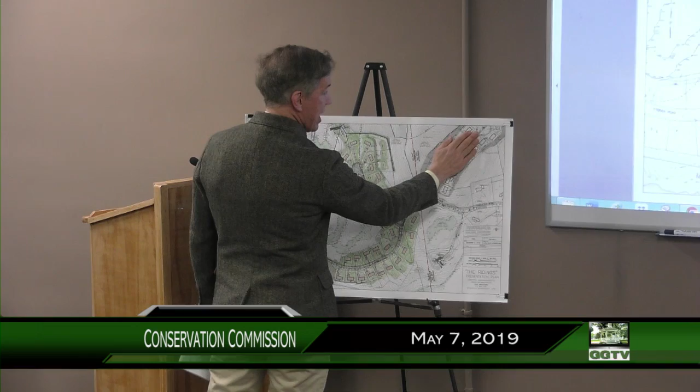And the phasing that we're proposing is that the first phase of construction is the main road, Stinson Road, and Harvest Way is this connection. The second phase is the two cul-de-sacs. That is because, again, of the material balance required; in order to have more than a 500-foot dead end, you have to connect all the way through. And to make this necessary fill in here, you have to take this cut from here. So the first phase of construction is the main road and the connection to Harvest Way. The second phase would be the two cul-de-sacs in Grafton.

I guess I'll leave it at that. I'm sure there's other things that will come up as questions or that I'm forgetting in the moment, but I'll try and answer your questions.

Sure, so from a standpoint of low-impact design, what are you proposing? Say you have really good soils. What are all the different things that you're doing to have a more natural-based system? Well, we're doing infiltration as much as possible. We are concentrating by having the open space subdivision, we're having smaller lots. We're talking stormwater. Are you doing roof infiltration? Yes, to the extent possible, and I don't have the number of lots. If you look on the plans, you'll see, for instance, on lot number 22 here, you have it in the backyard, 23 in the backyard, 4, 5, 6, 7.

Basically, because this is a till material with a relatively high, typically like a 36-inch, depth to seasonal high groundwater, we're infiltrating roof runoff on all the lots where there is fill. But on a lot like number 17 here, where it is cut, we didn't think it was really practical to propose roof infiltration. So we don't have dry wells proposed on the cut lots on the uphill side of the road, but we do on all the downhill side lots, and on the lots that have fill on the downhill side of the main road. We also have a couple of these lots as well. We did propose it on all the lots where we believe it was feasible.

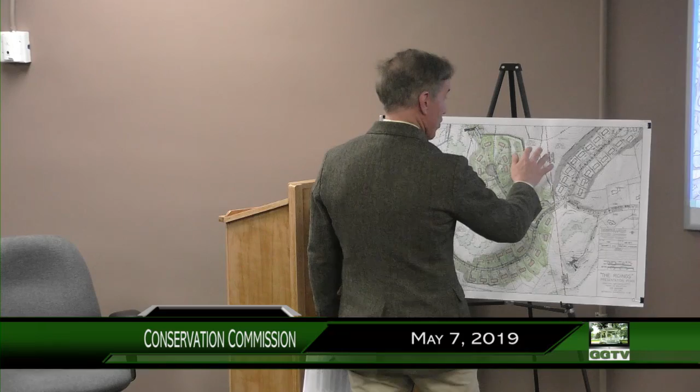But yeah, if you go further up the hill, somewhere here you hit the 70, 80, 90, 600, you're in the 600s at the peak of the hill. And you said where's the runoff from the Westboro side? Where's that going? Sure. It's a couple different ways. Much of it actually goes to the wetland that's over here, on the, I guess you say north or east side of Harvest Way.

That flows through a culvert, you see a bit of a green edging here. This is wetland. The flow from that culvert goes through a wetland here, and there's two culverts under the Mass Pike, two similarly sized granite culverts. One is just to the Grafton side of this town line, probably about here, and the other one is over here. So most of the Westboro site goes to that wetland, through the culvert, through the wetland, and then down to the big culvert into the Mass Pike.

Again, it's kind of an oval-shaped peak to it and contours. Much of it actually is coming into the Grafton side, and is going to go through this open space. So I'm glad you raised it. You notice on the back of these lots, numbers 18 through 21, you see a dark line here. This is hatching, indicating a very wide swale that's proposed.

We were debating to try and pick this up with a series of drop-inlet catch basins, but we just made it a very large and wide swale to protect the backyards of these lots and direct the runoff coming down the hill to that detention basin. And then in terms of moving of the earth from the Westboro side down to that southern portion there, is that going on both sides of the road? Yes. Okay.

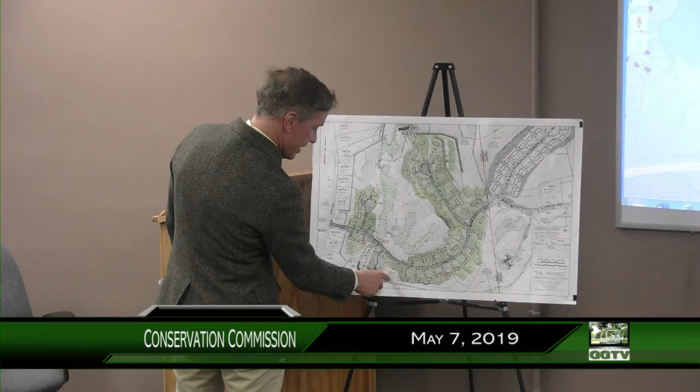So I don't think it's actually gonna be a significant change from right now, because this area right now does have some, you could draw up a little sort of long pie-shaped contributing area to what gets here. But again, most of the hill flows into this wetland and then down. This is just, again, sort of narrow swaths of the hill that are getting to this area, to that wetland in particular. Still going to be a bit of a gully, though.

I'm assuming the Mass Pike at that portion is going to be elevated higher, so in between the two. It is. Yes. So okay. And then in terms of the Grafton water, you said they get good water pressure there. Is there a pumping station going in to get the water up the hill?

No, actually, and I'll get the numbers wrong, but on both sides, to our very pleasant surprise, one of them was like 100 PSI, the other was 90 PSI. I forget which one was which. They were both very strong, such that even if you take that and look at the highest house, you should have more than adequate pressure, even with the drop for the distance and the drop for the friction.

Okay. And then which side is going to be used as the construction entrance? I don't know that I could say that either side is gonna be exclusively the construction entrance. I'm not familiar with the Westboro side, but just knowing the Grafton side, Adams Road is obviously not a large road. I can tell you this is easier to drive in. I'm just talking in terms of the heavy equipment coming in, and Adams Road, the town's going to end up having to replace that again.

This is easier to drive in, and I know that the discussion with the folks in Westboro was just that they didn't want a trucking route, material leaving here, and they were relieved to find that you're essentially taking material from here to there. But I don't think it has been planned necessarily as either side being an exclusive route. I think it would depend upon where a vehicle is coming from.

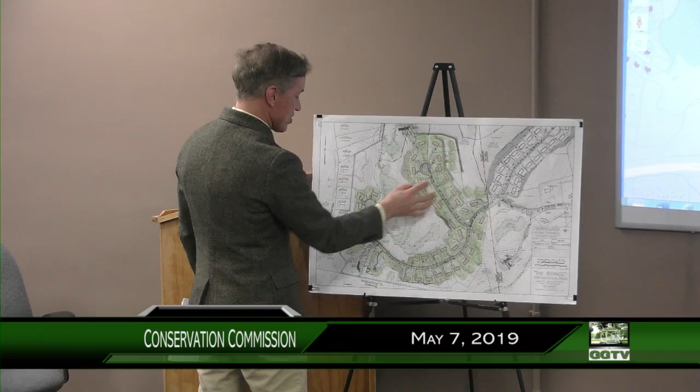Then one other question. In terms of the housing, only because I haven't seen that yet, what type of housing is going in? Obviously single-family homes, town water? Single-family homes. Yep, and the Westboro side has sewer. The lots on the Grafton side are actually a little bigger because one of the odd things about the Westboro equivalent of the open space bylaw is that it restricts you, you can't have a lot more than 15,000 square feet.

And that's how they achieve getting a certain amount of open space. Whereas the Grafton bylaw, which I think is better, says you're gonna give us at least 40% of your land. Actually, we would be giving 62%, but you're gonna give us at least 40% of your land, and then it has sort of restrictions within that of what your average lot size must be, et cetera. And the average lot size is, I think it was just over 20,000 square feet. So the lots are actually gonna be larger in Grafton than in Westboro.

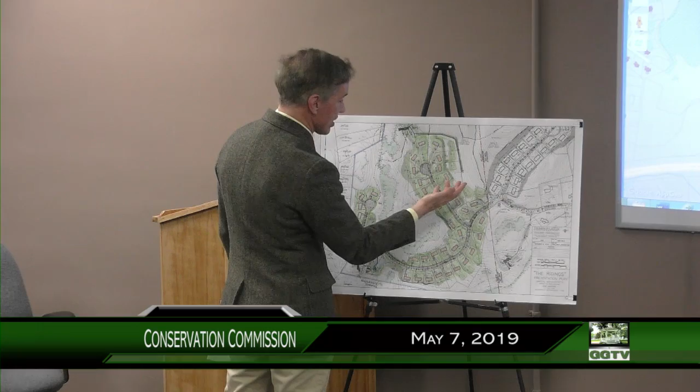We're showing the same size house, which again is just a stand-in as a theoretical reasonable one of 70 by 36 on all these lots, both in Westboro and in Grafton. So what's your typical square foot for the house? Oops, I had it before. Roughly, 2,520 square foot footprint. And there was a point of discussion too in the Westboro side.

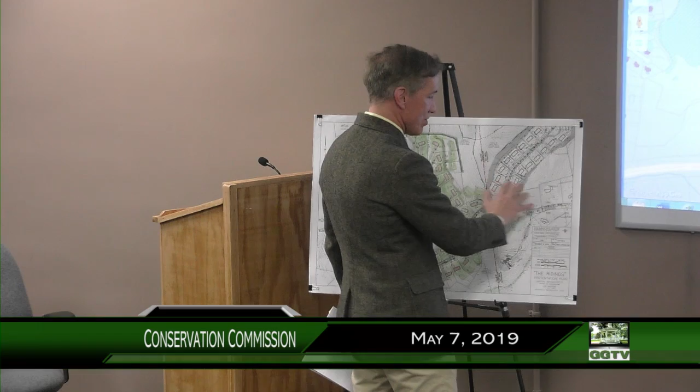There was some discussion worrying that these houses would not be up to par with these, and we're actually able to show, because we had done the as-built of the foundation of some of these houses, that that's almost exactly the same size houses as some of the people who said they were worried that these houses would not be up to snuff with theirs. So I can say it'll at least be a comparable home. Anything else, Scott? Nope.

So, a couple of things. You don't have a separate erosion control plan in here. No, we have it on the grading plan. For me, it's all the things that aren't shown on here. That question is your slope stabilization. I think on one of them it shows an entrance and so forth, but there's not a lot of detail. All you have is perimeter fencing and a couple of random areas of settling basins. So a little bit more detail on what's going on with erosion control, details and things like that. You've got large cuts here.

This is a cut or a fill. Let's see here. That's a cut. The bigger are the fills on the Grafton side. Yeah. Well, this one's a big cut, it's a 24, 30-foot cut, and I know you have 2-foot contours, so it's hard for me to tell. I guess 2 to 1, 3 to 1? We have some of both. Okay, so what are you doing for slope stabilization? Well, in the details, we do show that slopes steeper than 3 to 1 would be either riprap or an erosion control blanket, actually overshooting it for a 2 to 1 slope, rated for use on a 1 to 1.

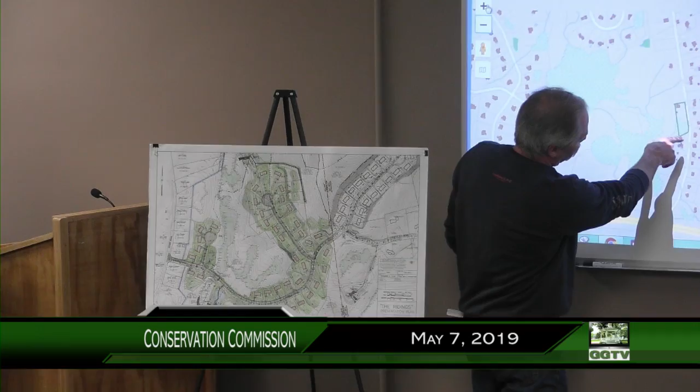So this wetlands here is all part of the property that we have. There's actually a stream that runs down here and comes onto Adams Road. That's 106, that's the O'Connor's house. And some of it runs into the catch basin. The 6 catch basins through here dump onto our wetlands. Gotcha. So anything that runs down the hill into the catch basins ends up in our wetlands. Then there's a stream that runs between 100 and 98, and it actually floods 98 Adams Road's basement.

They have a sump pump that runs almost constantly. That pumps into that stream bed, and that runs under the road and into our wetlands. And then there's another one between 98 and 96 that comes down off this hill. So when they start working up here and building up here, my concern is the runoff from the roofs, the roads, the driveways, the sidewalks.

Now there's not ground up there to absorb it, it's all gonna be faster moving with less absorption, and it's gonna run down these stream beds and end up in our wetlands. Our wetlands now have gone almost up to our shed. Our side yard, where our shed is over here, we used to be able to walk on it in May or June. We can't walk on it. Last year, we couldn't even go over there and mow because it was so wet, you would leave a footprint, and it's even worse now.

So this winter, the frost heaves actually moved our shed 6 or 8 inches up into the air because the water table is so high back there. It's been a wet season, and we didn't have a lot of snow, but we had a lot of precipitation. So our concern is less area for absorption and more speed to the water with the roofs and the sidewalks. And we wanna make sure that there's some way to make sure that they're gonna prevent any excessive water coming down the natural flow that's already there, which is gonna flood us even more.

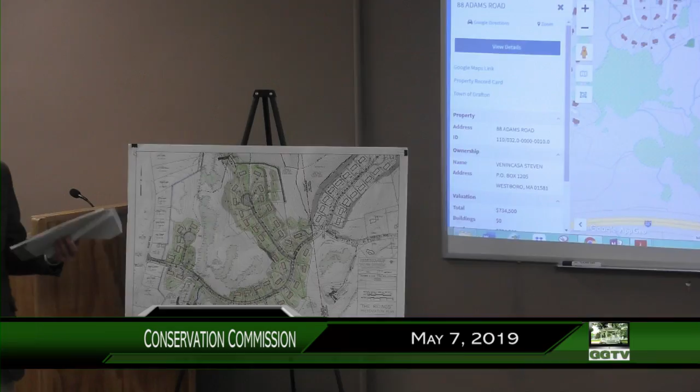You also are showing that the open space is going to be turned over to Sudbury Valley Trustees. Correct. Do you have an agreement in place on doing that, or is it just a? There's not a formalized agreement, but Steve Sloan of Sudbury Valley Trustees was attending all of the planning board meetings. Okay. And it's not just a speculative thing on the part of the applicant. He's had a lot of discussions with them, and they indicated their interest in taking ownership of this parcel.

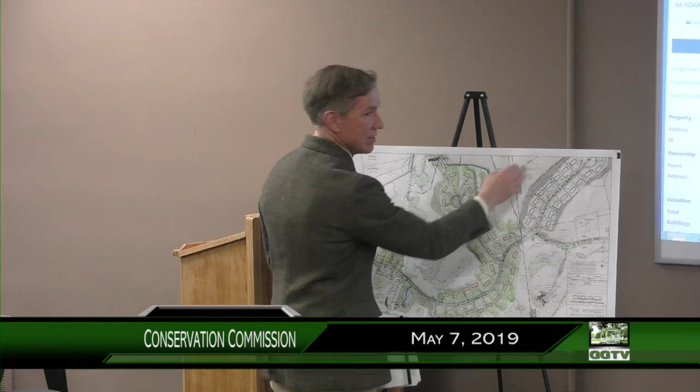In fact, they also had discussions with the adjacent open space parcel on the Westboro side, and I think the way it has been left at this point is the town of Westboro Conservation Commission wants to keep official ownership of it, but they're actually gonna have Sudbury Valley Trustees, in effect, maintain it, if you will. So they'll do a conservation restriction, and then Sudbury Valley Trustees will be the holder of the conservation restriction. So that's the way that works.

We're fine if, as obviously the planning board, you have to go through this and designate who's gonna have the open space, and Sudbury Valley Trustees is fine by me. I just wanted to make sure that we understand what's happening with the open space, and that open space cannot be developed in the future. We understand. So, having said that, hopefully everyone got a little bit smarter about this particular project.

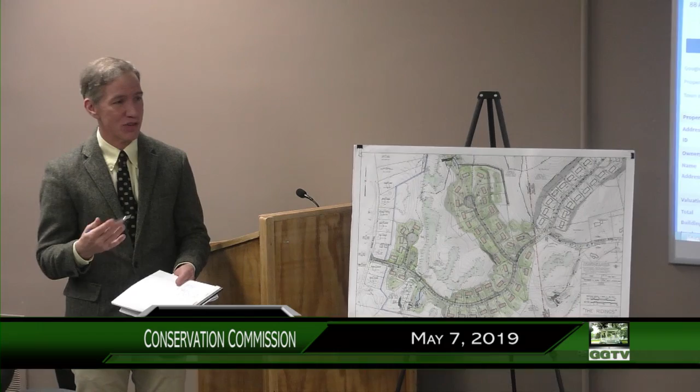Again, we're basically gonna ask the applicant now if he wants to continue this. Since you don't have a DEP number, you have no choice. We can't close a hearing without a DEP number. Having no choice, Madam Chair, I would request that we please have it continue. And if you want to get picky, some people will not open a hearing if you don't have it, but that's okay. So when would you like to continue it to? What are the options, 2 weeks out or a meeting in June? I'm not sure 2 weeks out is the right choice, given the interaction we still have to do with the planning board and the peer reviewers.

Maybe we should request June 4th? June 18th. We're not doing June 4th, summer schedule. Okay, I guess I would request a continuance to your June 18th meeting. Okay. I'll make a motion then. Yep, go ahead. I'll make a motion that we continue the hearing for the Ridings subdivision until June 18th. Do I have a second? I second it. All those in favor?

Okay, thank you very much. Make sure you put it on your calendar. You can always call the office if you're not sure when it is or what time. On continuances, we do not do a specific time. We take all public hearings for the first hearings usually at 7:15, and there might be one at 7:30. And then after that, we'll just take the continuance based on how many folks are here.

Thank you very much. Thank you. I'll be out in the hall if anybody from the neighbors wants to. And if you do, please, out of earshot down the hall. Correct, I should clarify. Thank you so much. Okay, next. Talking about continuances.

Okay, so the next one up is gonna be Church and West Street? Okay, very good. Okay. So here we go.

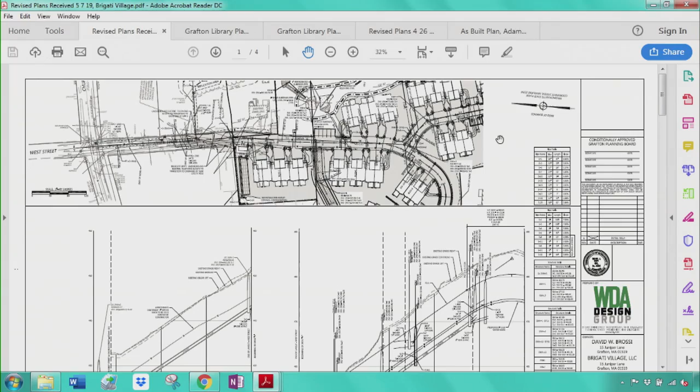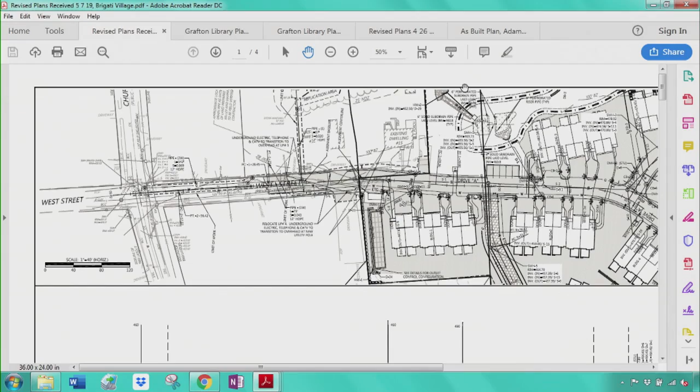So basically, what we're looking at is the house in question. It's this area in here. We're picking up that, bringing it down the street, connecting into the existing drain manhole. Thank you again, Leah. And this catch basin here and this catch basin here, as I described before, seem to be interconnected. So we're taking those offline and plumbing them into the main trunk line, which will make for a better system. And just a question, DPW is okay with you making those connections and so forth, and they don't have any issues downstream?

In terms of the volume? Just in general. Yeah, so it's going there anyway, right, as we see it. Again, I'm just making sure that's covered. That's a good question, right. So it is going there, and as we discussed at a previous hearing, we do know that there's water coming through the backyards and eventually making it through that Church Street quasi drain system that's out there, and so everything seems to go down into their street system.

Okay. When we looked at this, and as I said at the last meeting, we were proposing to put in a drop inlet with a grate and a trash rack on it. Oh, at the inlet. At the head of that pipe, correct. Yep. And so it appears that there is some debris that gets in there, though I would question whether or not, even if it weren't clogged, how well that would function just based on the tributary watershed to that area.

It is a 10-inch pipe close to the ground, at the ground surface, with not much head. So what we are proposing, as I discussed last time, was that drop inlet where we're able to generate a little bit of head on that. And if you look at the 10-year storm event, the 24-hour rainfall, basically an NRCS type analysis of the watershed tributary to that area, the volume that it's going to be able to take is that of like a 10-year storm event.

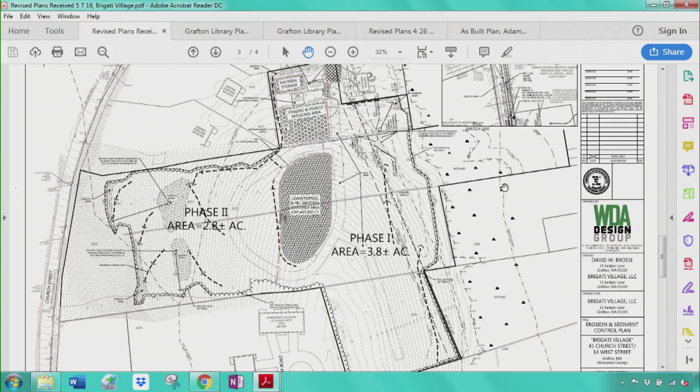We did show, Leah, if you could back up to the layout materials plan, there was a request for demarcating on the plan the limit of work. And so that's defined along here with multiple call-outs here, and around the perimeter, calling out the limit of work, which is held at the tree lines and the erosion and sediment control measures.

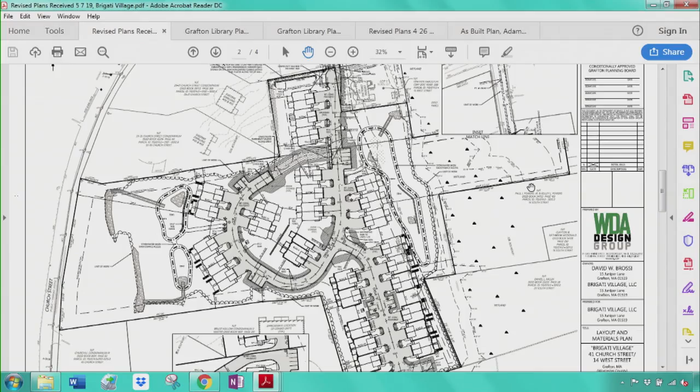There was a question in the correspondence from Leah to address perhaps some of the comments that had come up at the planning board in some correspondence. One of the things that Joe Layden had requested was some explanation in layman's terms as to what the soil borings meant. So I reached out to Northeast Geotech, Mark Zambernati, who's the PE on the project, and he gave a nice narrative. I believe I forwarded that to you, Leah, so that is part of the public record. If you'd like, I could read through it. If not, we'll do whatever you want.

I'll go to my fellow commissioners. Yeah, I kind of get it, so. Yeah, I know. So I sensed that.

And then there was a letter from a Philip Knock, who was in attendance at the planning board meeting, and also at the Concom meetings. And the question had come up with respect to the vernal pools. As the commission recalls, we had your representative from Ecotech, Art Allen, and we had Brian Waterman here, who had gone out to the site and had made some observations in the field as to the proximity of these pools that exhibit the characteristics of a potential vernal pool.

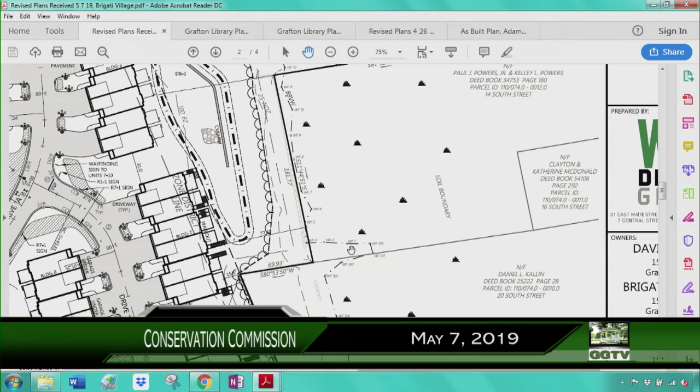So with respect to that, the building structures, if you look at this dimension here, that's roughly 70 feet. Oh, here you go, 77 feet from the property line to the structure. And then, as Brian said, it was about 80 feet to the limit of clearing, which is about in here. So if that's 80 feet, it's well over 100 feet from this area in here to the structure itself. So we would beg to differ that it's within 100 feet of that.

My understanding, and I'm not sure after I had to run to the other two meetings at the last Concom meeting, whether or not Brian and Art got into buffer zones associated with vernal pools. I recall from years ago that the vernal pool buffer zone, if within a resource area, the limit of the buffer zone goes to the edge of the resource area. If it's not within a resource area, then the buffer zone, I think, Madam Chair, is 100 feet from the actual, no?

It depends upon the local bylaw. Having been involved with some cases, there isn't a buffer. If it's strictly a vernal pool and it's a habitat, you know, there's stuff under the Army Corps, different. So, yeah, under the wetlands, it actually is surprisingly not a lot. Interesting. A lot of local bylaws do trump that and so forth, and so you can't fill them in because it's a habitat, but habitats don't have buffer zones. Correct. Okay, thank you very much.

I did note that in your wetland regulations, the discussion of vernal pools, talking about, as you did, I think it was one of the first meetings when discussion came out about a wildlife habitat assessment because we're not altering a resource area. We had that discussion. So with respect to that, the vernal pool discussion, from my memory from the last meeting, is that although there might be some characteristics, it wouldn't meet the regulatory requirements of a vernal pool based on the observations made.

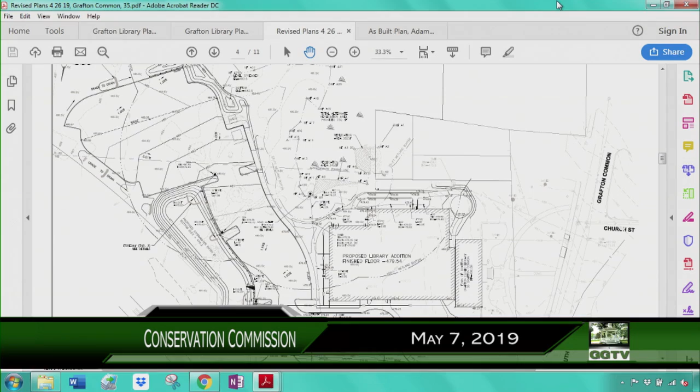Yeah, maybe, I'll come over. So we put in the first manhole here that connects down to the street. Once that's in, as they're installing it from the wetland side down, they would be able to dewater and pump around if they had to. Hopefully they can do it during a period of low flow and there's not much groundwater or need to dewater.

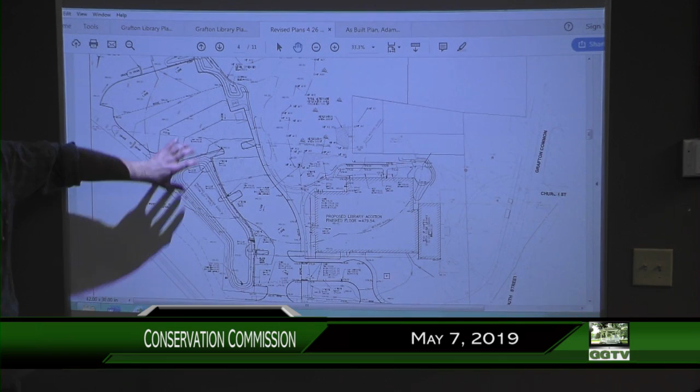Revising some of the plant selections, called out locations of porous pavers, the self-verification form for filling the wetland, which is in this general area, that will be done prior to the start of construction. There's not a contractor on board yet, it's gonna go up for bid. Once that happens, they get the contractor to submit the form. And then as far as we're concerned, all we want is a copy of that process so we know it's done. We're not gonna review it, it's not our jurisdiction, but we wanna make sure it gets done.

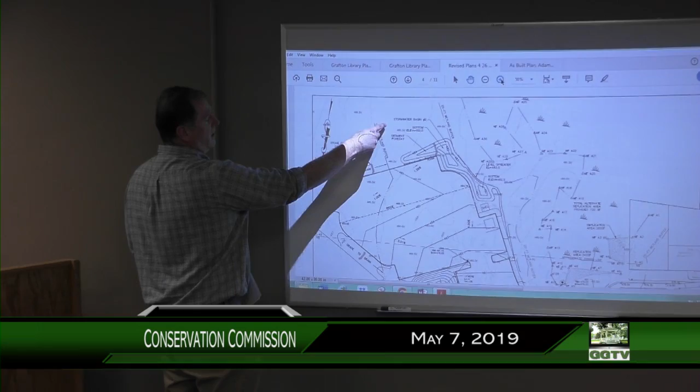Okay. And then back to the stormwater basin up here. There's some DEP comments about the forebay. So this portion of the basin got elongated, and a forebay with a stone check dam right there. And then the runoff will come this way, dump into the forebay, and then proceed for the rest of it. How's it going through the curb and what kind of?

It's a flush curb. Okay, so just be careful of erosion, because I don't care, even if you say that curb is flush and is level, it never is. You're gonna be out there doing stone and stuff, so there's different ways to handle it. It's something that we'll look at during construction, but FYI, when you do it, it never comes out the way you design it. Yeah, you're building it with 20-ton machines, so, yeah.

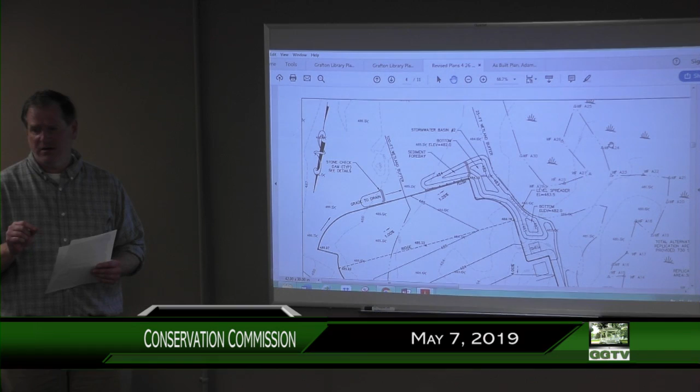And I believe that's all the technical questions. Graves had reviewed the resubmission of the plans, with all the issues that Graves had identified resolved. I think the only thing is one comment by Art Allen about the plant selection in the replication area. Turn it over to you. Sure.

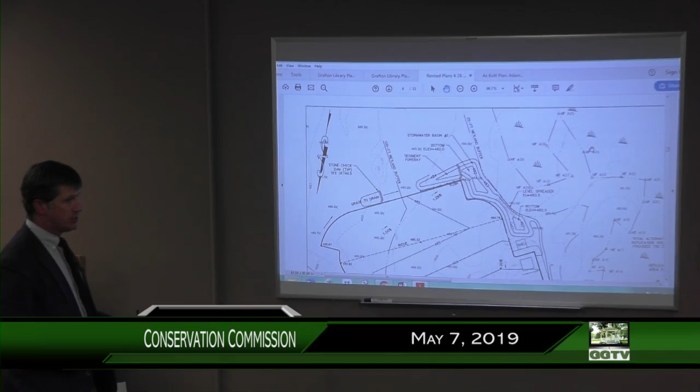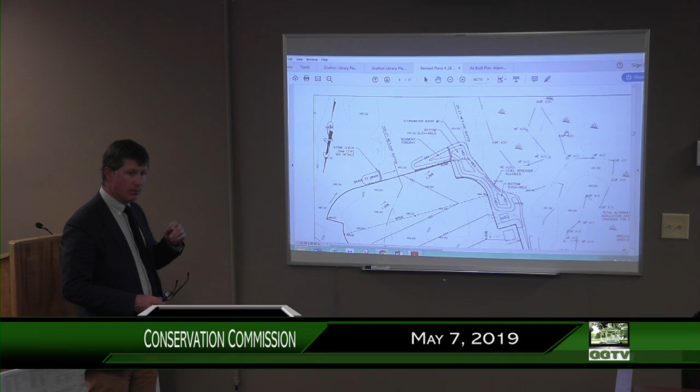So first I should say that we just recently heard back comments from Art on plant selection. So, Leah, do you actually have the two separate sheets? Yep. Great, thank you. Is there a particular area you want me to zoom in on? Well, so we have two options. First, I'll say they're largely similar, and so I'm just going to point out the differences.

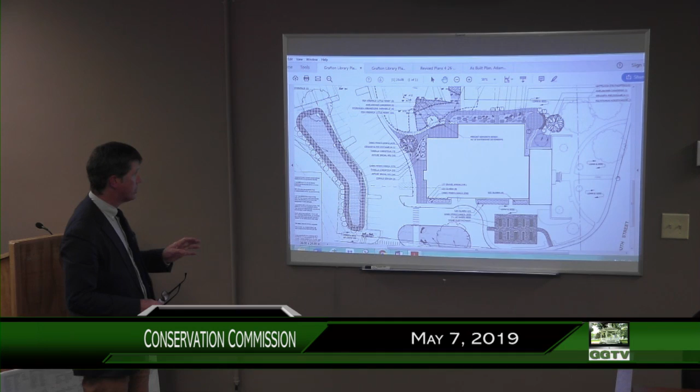This is what we're labeling option A, which is the option that we are preferring, and in this option we are asking for a waiver of continuing this porous paved pathway from a children's story area. This is basically access to a boiler room and some mechanical space, so this is not a widely used space. Currently, this is paved asphalt up until this patio space with concrete block seating as it slopes upward towards the commons.

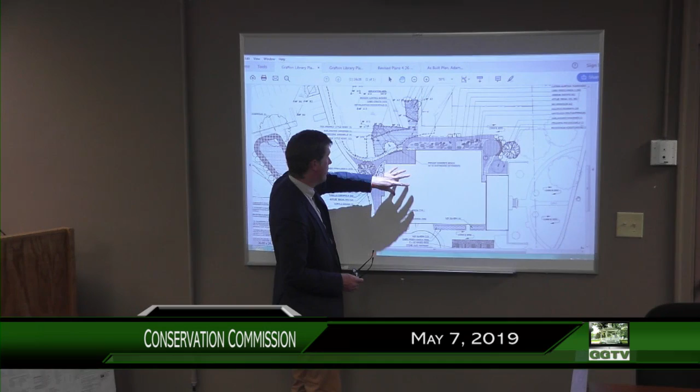This would be all porous paving, connects to a children's program room here, and then this connects back to the main patio that is off of the main primary program room in the library, which then wraps back over to the parking lot and to the new entrance of the space. So all this is currently proposed to be porous pavers, and then the vegetation in the planters adjacent to the building is using a series of different wetland species.

And what is consistent in both plans, the alternative locations for the wetland replication areas are this area and this area, both totaling 730 feet per the size of the existing isolated wetland.

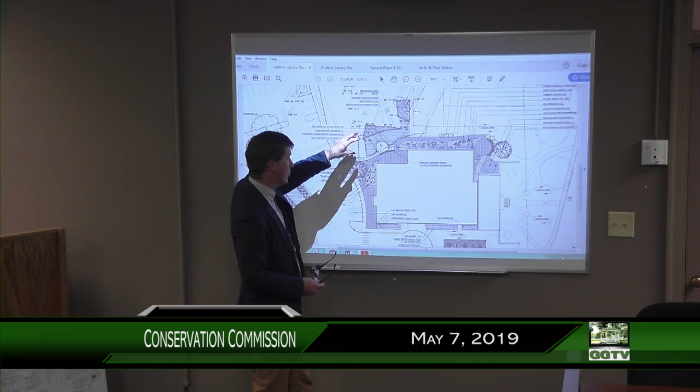And what we're proposing to do is having a series of wetland shrubs along the embankment here, and then in the area that will be temporarily disturbed while plants are being installed and soils are being relocated into this area for replication, that this area would be reseeded with a wetland conservation mix, essentially, from New England Wetland Plants, so that there'd be a diversity of species that would come back in and fill this area in, and allow a large, about a dozen species mix to populate this and add greater diversity through this area and fill that in.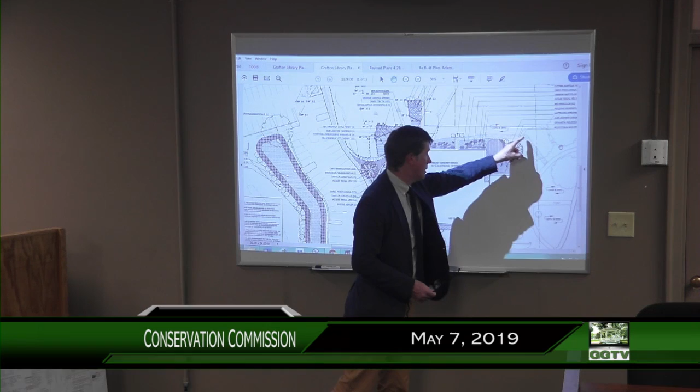So that's the large difference, this section through here, and the second plan. Actually, if we could bring that up just so that we can point that out. Thank you. So the second option B, and what we had shown at our previous hearing, there was a dashed path showing option A as a dash location. And this was showing that only the patios were done with pavers, and then this was a cast-in-place concrete pathway that would then connect up to the commons.

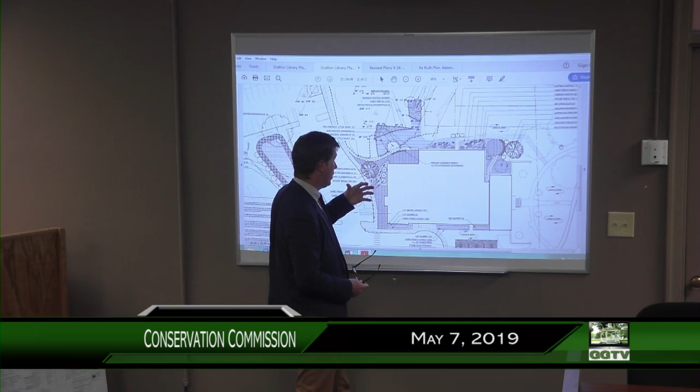So we would prefer the path to be able to connect these two patios together and also allow for egress from the children's space to empty into the parking lot versus up into the common space. We realize that in the other option, we're cutting through the 25-foot no-build zone, and so we're hoping that what we're offering in exchange for a waiver is sufficient to strengthen and enhance the wetlands in that area in between the wetland replication location and the disturbed soils within that 25-foot buffer. So we are ultimately preferring to ask for option A for that location. I think there's greater continuity for library function and that it would be sufficient for this area.

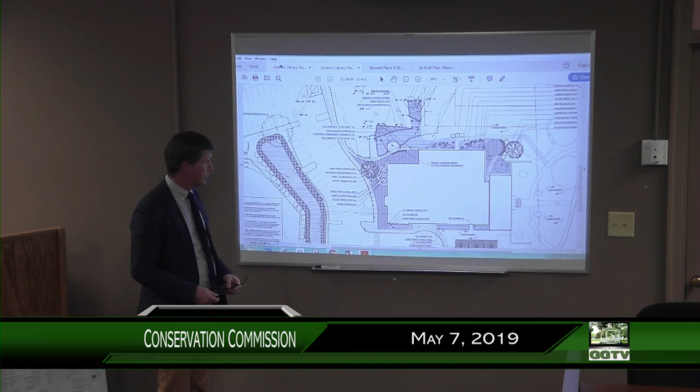Can you go back to option A real quick? So basically, can you zoom into the 25-foot line? So basically, it's the dash line right there. What's this? So this is a large scale. That's the 25-foot line through here. Okay. So this is roughly 226 square feet of pathway that would be within that space.

So the area that you're gonna do with the wetland mix or a wildlife mix, what's the long-term maintenance of that? Are you intending to keep it as a meadow, or what is the intention of that area, and how do we know it's gonna be maintained? So it would be maintained by the library to remove invasive species. And the idea with it is if some version of succession is going to occur, that's just fine. There's no program space in that area, but there's no large mandate to mow it and keep it as a meadow.

And that's kind of the key question, what is that space gonna be like, not just the year after you seed it, but are you gonna let succession creep back in? And I just wanna make sure it's clear that if we look at this and say yes, we're gonna go ahead with this, that there's a plan of what the library's gonna do in that area. Right now, it's full of invasives. Yeah. The area is disturbed to a fair degree by a series of invasives. So I think it's fair that that would be a condition within this.

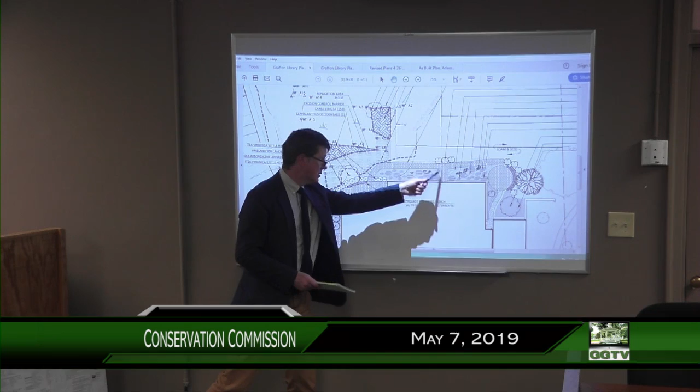Still need to shovel. There is one other space that you guys had brought up at our last hearing, which was for the stormwater basin on the west side of the library. Just have to remind myself, the plans' orientation is upside down. The previous plans were calling the basin here, we were just speccing that with Carex stricta, and you keenly pointed out that may not work very well if this was about 4 feet above the water line.

With the test pits that were dug, we found that actually the water line's a little bit higher than 4 feet, so it's a little closer to the bottom, but nonetheless, we changed what was called out for. Instead of Carex stricta and just a little bluestem, Schizachyrium, we're adding a greater diversity and integrating it with the same mix we'd be using in the basin, and then along the new 3-to-1 slopes, we'd be putting in a conservation wildflower wildlife mix. So they're slightly different mixes. They're listed at the top of the plan, but the ones in the basin take their moisture conditions, and the ones that are on the embankment.

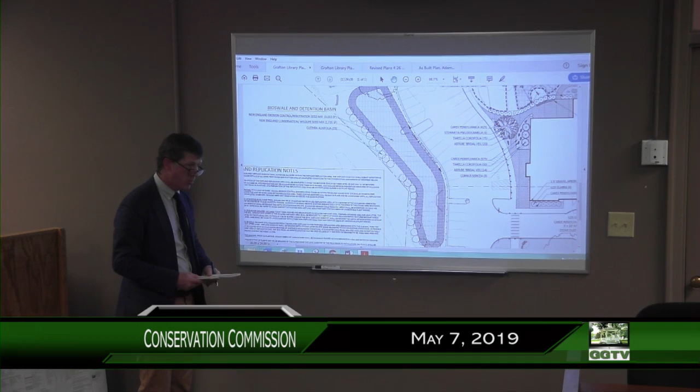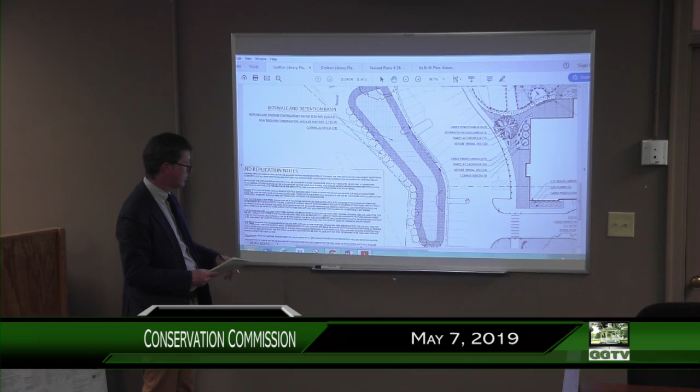And it seems like it's a safe bet when there's a greater species mix. It's 15, 20 different, yeah. So things are going to take a different elevation and naturally populate into zones that they prefer, where precipitation is happening, and it's also going to add an aesthetic, prettier space. We would propose for that area an annual maintenance. Yeah, once a year, which totally makes sense. That should be in your O&M, as yearly mowing, and that just prevents woody plants from getting in there.

The other thing with the basin, when it's going to be all disturbed and so forth, you might be fighting invasives. I don't have a good suggestion other than try to keep ahead of it. That's something we can bring up with the library director about integrating, have a volunteer corps that can. Yeah, the good thing with those seed mixes, there's both annual and perennial, so hopefully the annual takes hold before you get the invasives in there. I'm not going to do a condition on something that is hard to enforce. It's hard if you already have invasives in the area, so, okay, any other questions?

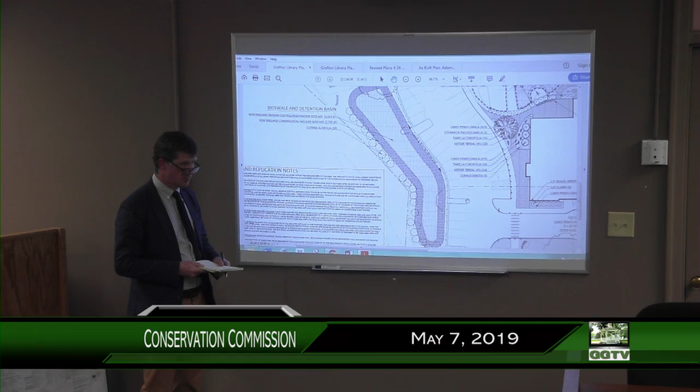There's no one in the audience, so no questions from the public. Anything outstanding? It seems like the test pits were done. Graves is pretty much all set. We saw the 2 alternatives. We'll talk about that in a minute. DEP's file number, basically the 5-foot is gone because they now have a forebay in there. So those have all been kind of taken care of. Trying to think what else.

If you flip it over, there's more points on the back. I'm reading them now, as far as the NOI form for impact resource area needs to be updated. Yeah, so when Art had pointed out that the wetland to be filled is actually isolated, I think you need to go back and revise the numbers that you list out on the NOI, because it was listed as BVW, so we just need to change that. Yep.

So as far as the sequencing of the replacement for the outlet structure, you talked a little bit about that. I would propose a condition that we include a sequencing plan from the contractor once they're hired. So that should be submitted prior to construction beginning. I understand you can put a sequencing plan together. This is a public bid project, so it needs to be in your spec, the requirement, and it needs to be submitted as a submittal and needs to come to us before that work is done.

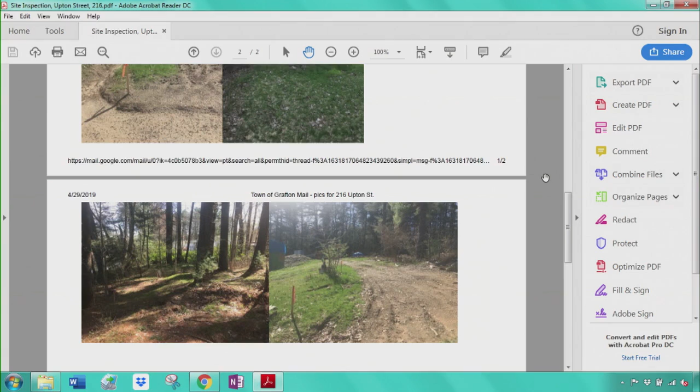Do you have the map of where it was supposed to be? The plan? I don't know if I put that in Dropbox. I did not, but I have your photos, if that's helpful. The footprint of the house that he's trying to rebuild is still there. It looks in pretty bad shape. I'm assuming they're gonna take that down. Was this a fire one? I don't think it was a fire. Just old? Yeah. Is this the house that has all kinds of stuff, like green insulation outside? Yeah.

And the person you were talking to lives beyond that? Well, the person I spoke to is in that blue area. He's the neighbor. There was nobody there the 2 times I was there. Behind this footprint of the house to the west, there were cars, almost like a temporary trailer, a lot of stuff, so somebody's redoing the house. They were using a path to get back there, kind of goes uphill. You can see in that bottom picture on the right this path that was supposed to be bordered off with bales of hay, the straw bales.

Right, we don't do hay bales because of invasives. Just think about how hay is created, right? So FYI on that. On the left side of the driveway, it drains down to the wetlands. If you're looking at the house, the wetlands are to the left, down a little bit. So a lot of stuff was running off. It's a gravel, dirt driveway that was definitely running off into the wetlands. That wetland is like a little pond, not even a pond, like a little tidal pool. Not big, not too deep. So stuff was definitely draining into there.